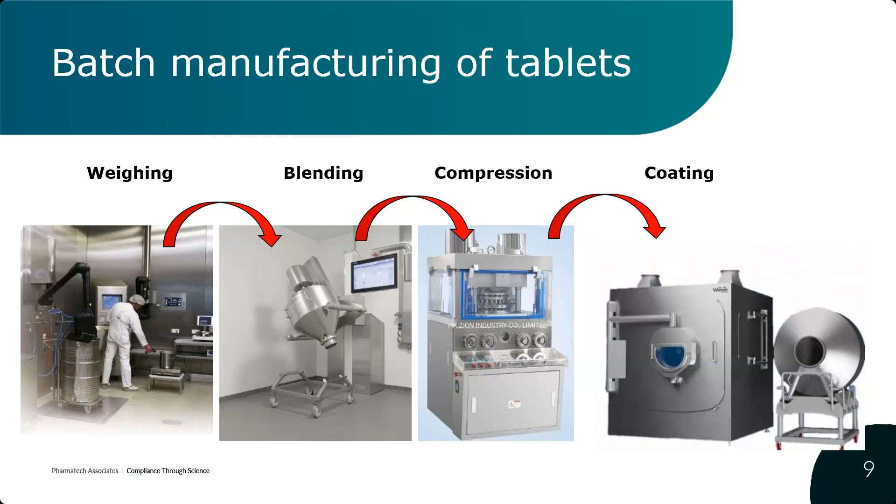After the release, the tablets can still go to the coating process. It's not always needed, but in some cases it is. Then after the coating, the final release tests happen that release the product to go to the packaging area.

Now, in some circumstances, it's possible that there are flow issues or segregation issues, and in that case, a dry granulation or roller compaction step is often added, where the powder mix goes between two very big rolls that press the powder together and create a ribbon. This ribbon falls apart into flakes that can be milled to the correct particle size distribution.

If the blend has compression issues as well, a wet instead of a dry granulation step could be done to create flowable granules with good compressing behavior, and after that it can go to the milling step again. Like that, well-flowable granules are being shaped and formed, and this should give good compressing behavior.

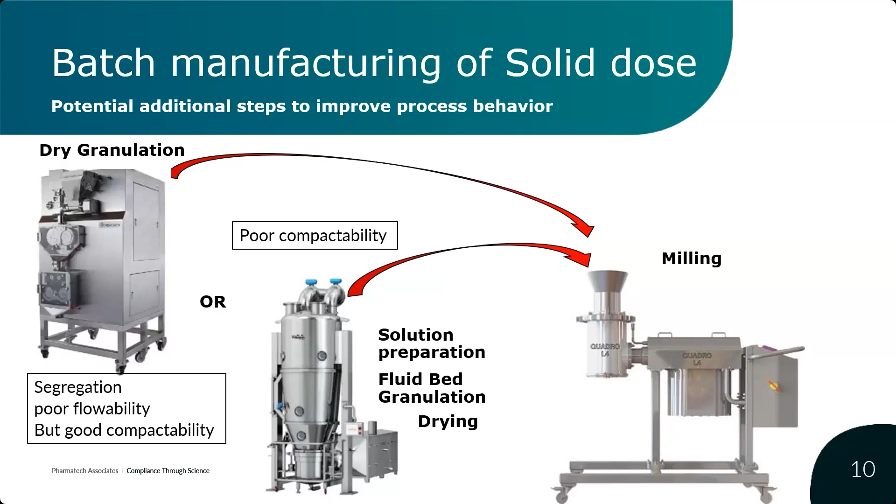Now, between all these steps, there are many days of testing needed. There's a lot of work to move the material around and handle the batch records. There is space needed for the storage of all the materials, and a lot of handling and transportation going on. So the cycle time of a complete batch process is very long to make solids, and it can be very cumbersome and expensive as a process as well.

Now, just imagine that if you could combine all these machines together into one large equipment train, connecting all these unit operations. You would be able to feed in all the material on one side of the line, and take out all the finished products on the other side in one go. So you would not have intermediate storage, you would not have to test in between all the time, and you would not have all those batch records.

You only have one batch record at the end of the process. Your batch size would then be defined not by the size of the equipment, but by the duration of the run, and that would be very beneficial. It would mean you could define yourself how long you run, making very large or very short batches, all using the same parameter settings. That means if you scale from development into commercial manufacturing, you would not have to change any parameters, so the tech transfer can be done very easily.

Also, during development, instead of having to make a new batch with each set of parameters you want to test during your design of experiments, you just have to run very shortly. You can switch over to your next set on the fly, and do fast and easy design of experiment sets with a very limited amount of material.

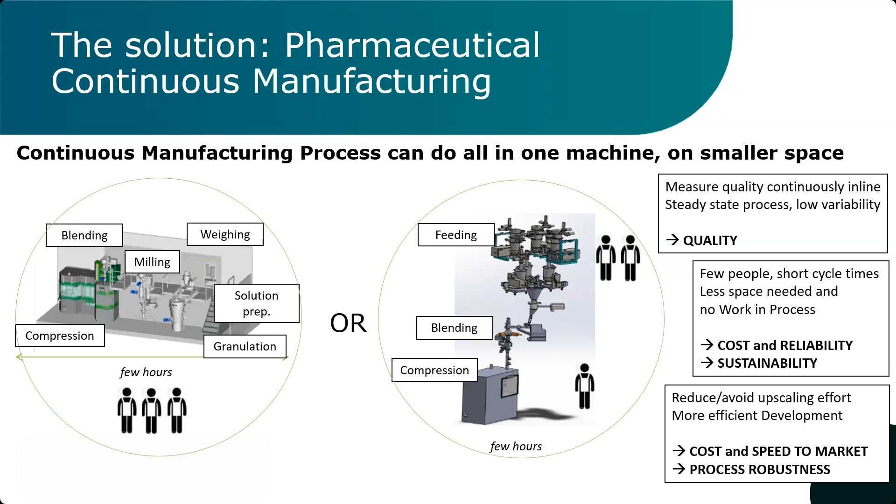That sounds wonderful. So in oral solid dosage, we've really seen that facility size can be reduced significantly. And what you said, Lawrence, about faster time to market, I think that's also relevant for generics because of the exclusivity period. If you're able to go to market sooner, that has significant economic implications.

When we look at the real differences between CM and batch, we already saw that in batch we have individual unit operations and equipment, and you move your entire material one at a time through those unit operations. We also saw a continuous line wherein the material flows from one end into the other. So there's definitely a sense of continuity in the material movement.

But if we go by the official definition, which regulatory agencies have harmonized, a continuous manufacturing process only needs to have a minimum of two unit operations which are connected together, with material flowing between them. That means a lot of so-called semi-continuous processes can also be considered continuous manufacturing operations, even when you have multiple unit operations still being operated in batch.

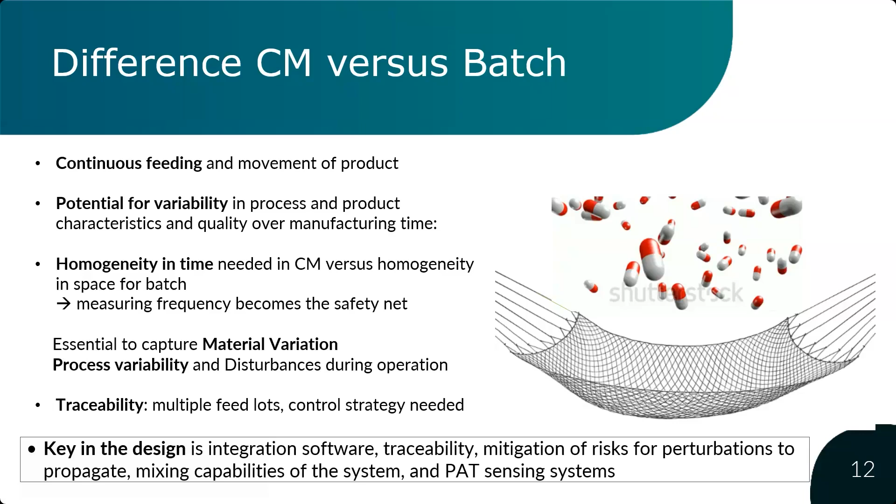We'll see how PAT and other systems help in the process. When we look at the potential sources of variation, this could be a longer list, and this is just a subset. It's very interesting because some of these sources of variation we do not have to worry about in a big batch equipment.

So you have incoming material feed, and you may have excipient batches coming from different vendors, or even different batches or lots of the same excipient. There can be minor variations in bulk density or particle size distribution. To mitigate this, I heard one company mixes 5 incoming lots together, homogenizes it, and then feeds it into their feeders. That's an interesting approach, but it depends on your material what kind of approach you want to take.

Then there can be some special causes for variation. For example, electrostatic behavior is critical in powder flow. If the powder is very electrostatic, it makes it difficult for it to flow, and we'll see some of the effects later on. Also, humidity.

In powders, it's very interesting: powders can behave like solids, they can behave like fluids and flow, and they can also behave like gases, as in they can fluidize. Humidity has tremendous impact on that, so sometimes we need to maintain a certain level of humidity in the environment.

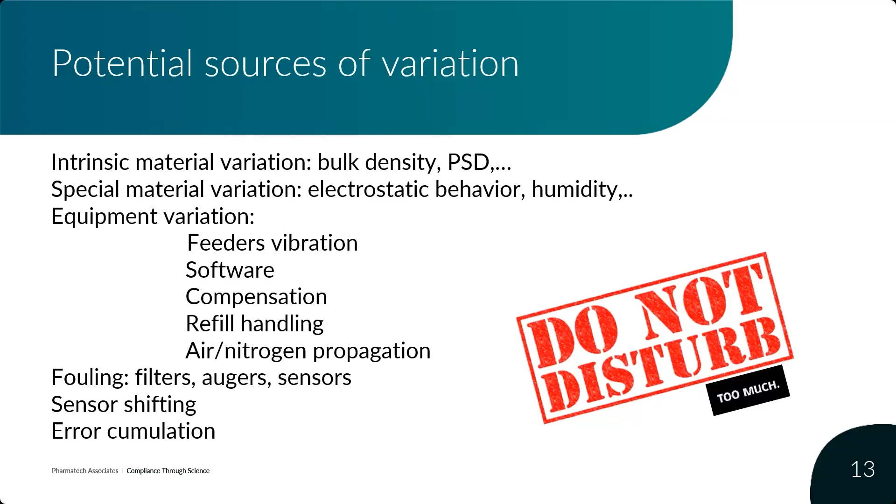Now, hearing Atul talk about the variation of a system, it becomes clear that feeding is the most important source of variation in the continuous manufacturing process, as it is the start of everything. But feeding is never perfect, and variation will always occur, because you work with augers, because of the variation of materials, because feeders are moving and vibrating on top of very sensitive weigh cells, and because feeder hoppers need to be refilled regularly, so the weigh cells need to stop working until the system is stable again.

And so the measuring frequency and the averaging of the data that comes from the feeder, from the weigh cells and the software, becomes very, very important. Because if the averaging or the frequency is too long or too late, then the real fluctuations can be missed completely, and it can give a completely false idea that you would think it's constantly dosing, but in reality it is not.

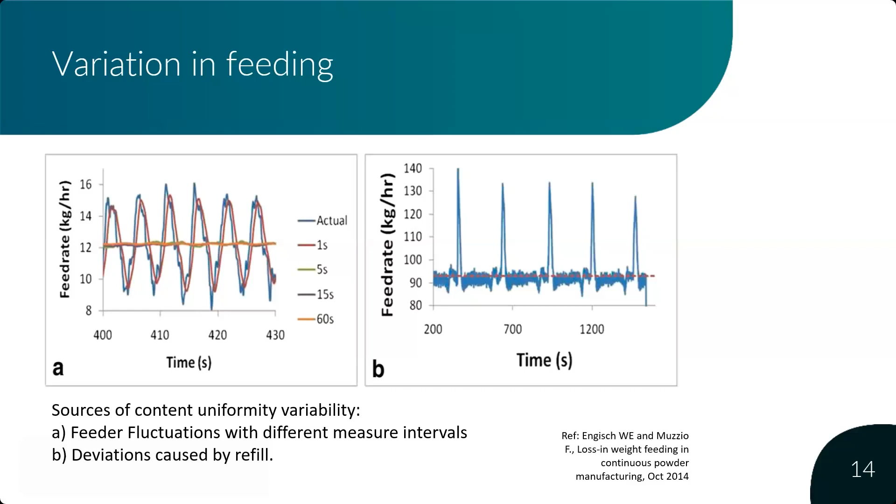Now, an overshoot of API from a feeder could end up in a tablet a few minutes later and potentially can damage the health of a patient. And so something needs to be done to mix all the ingredients and to minimize the impact of all this variation. All the time, and in every continuous manufacturing application, an inline blender is installed.

Now, more mixing by that blender means blending out variation better, but it also spreads it out more, so it will take longer to wash variations out. That's also not always ideal. So to find an optimum, the mixing capability of the blender for every formulation needs to be well understood.

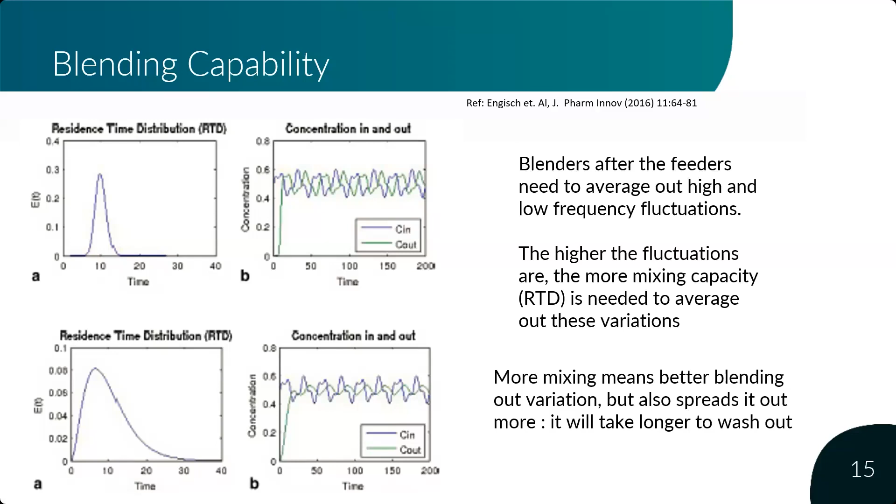And for which, how we do that, we call in a concept that is called residence time distribution, or RTD. Now, RTD is a probability function, a distribution function of the time that particles need to move through a section of the line. And that describes how a particle behaves inside the reactor.

First that is defined theoretically, and then it will be tested with experiments that prove the theoretical curve corresponds to reality. And that's how it's done.

Now, after defining the RTD like this for an individual unit operation... Lawrence, before you move forward, I do have a question. Yes, Gabriela? Related to the tracer.

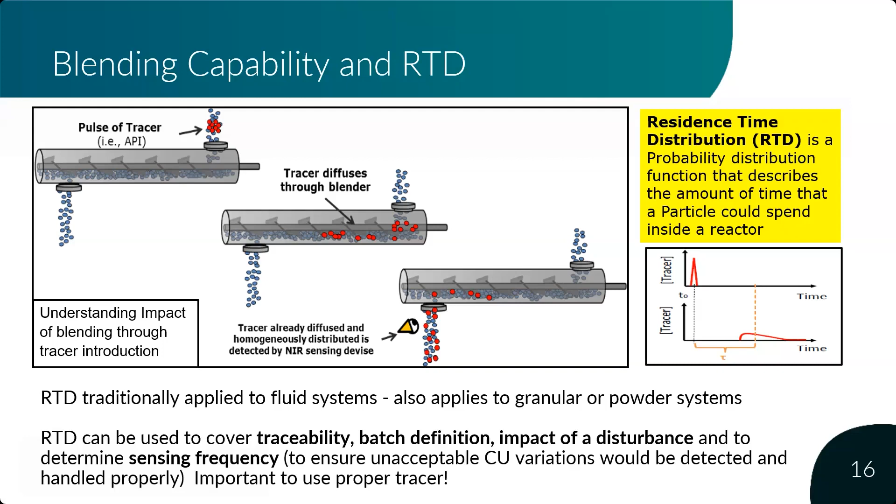Once you've done the RTD calculation for a blender, you can also do that for your compression machine, for other blenders, for other parts of your line, even a tube where material passes through. Then you bring all of those RTD models together into a full line RTD, which gives you an understanding of how variation or disturbances propagate through the line from beginning to end.

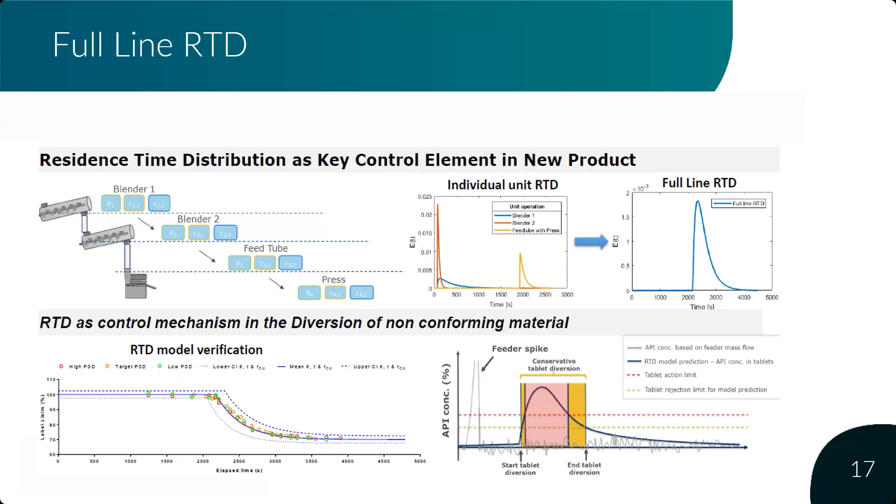All of this will give you a lot of information. It can help you detect a disturbance and know exactly when you need to open up your reject valve further down the line. It can also help you, if you find an out-of-specification result at the end of the line, trace that back all the way to the individual sublots of excipients or API used at the beginning of your process. And it can help you identify what the sampling frequency or measuring speed needs to be for other sensors in your line, to ensure you can capture all the variation of your process.

So what can go wrong in a typical CM train when we look at just the feeding unit operation? These are some good pictures that really demonstrate what can go wrong.

There are powder flow issues, as we all know. In a feeder, typically we have a screw auger that is conveying the material out of a hopper. And if the material is too sticky and it sticks to either the auger or the walls of the feeder, it can create challenges—you could have clogging, you could have obstruction to the flow.

The properties of the material, such as cohesive properties or electrostatics, particle size distribution, and surface energy, are measurements or properties that impact electrostatic or cohesive behavior. These could create phenomena you see here, such as bearding of the material—it creates a beard-like thing, I call it the Santa Claus beard, out of the feeder outlet—or it can create rat holes, where the material sticks around and you have an empty space in between with nothing flowing out. You could also have material that coats surfaces.

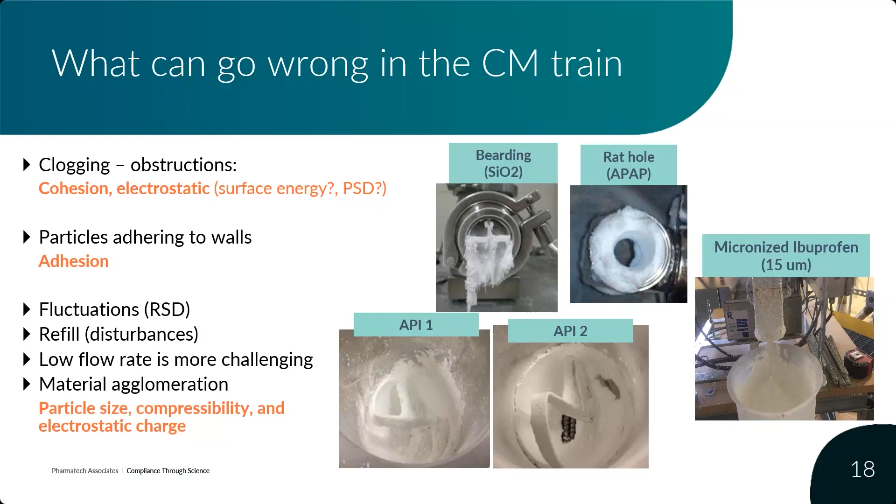This is why proper characterization of material properties is so critical, and material characterization is an important element of control strategy for any process. Knowing our material is extremely important, because these flow issues can really make or break a continuous manufacturing process.

So how do we solve this? I can tell you there are solutions available for each of these flow issues. We have to fundamentally understand our material and the equipment we're using, and the interplay between that material and the equipment. So we have many solutions.

You already saw some agitators in feeders that are there to make material flow. And I'll tell you a funny story—I've seen a hammer often used at some companies, jokingly called the GMP hammer, used to hammer on the vessel to make the material flow or the powder fall. But we have to be careful about all these solutions, since they can introduce variability due to vibrations.

So we have other devices like outlet screens, agitators, impactors, and vibration units, and special types of hoppers. You can also make changes to the material itself to help it flow better—you could deionize it, apply special coatings, and so on.

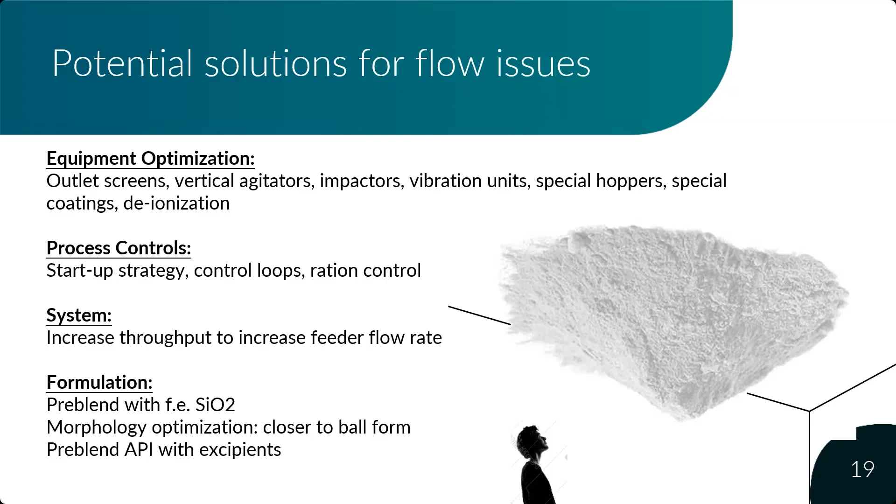That table that you see on the screen now shows, for instance, that there's a lot more charging that happens when there's pneumatic conveying of the particles, because those particles typically rub more against each other than against the wall of the equipment, and that is what gives the most charge, or more charge, according to Gibson. And that's surprising, because you would think that milling would be a lot more impactful at first sight than pneumatic conveying, but according to his calculations and experiments, that was not the case.

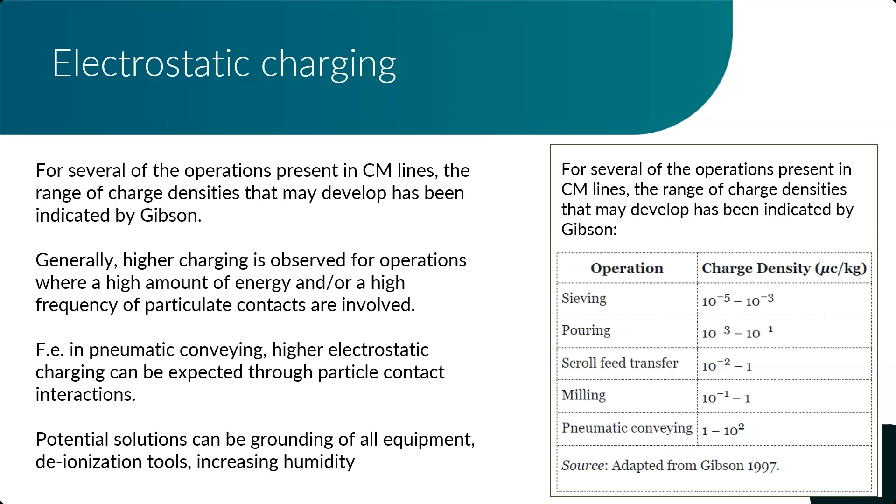Now, overall, with everything that's said about variability, we can conclude that you create a robust process if you're able to have full reliability under different conditions with different disturbances, and your capability to handle variation is what drives your robustness in a continuous manufacturing process. And it's the ability basically to achieve acceptable limits, and in reality that often is measured with things which are called process capability, CPK, or process performance, PPK.

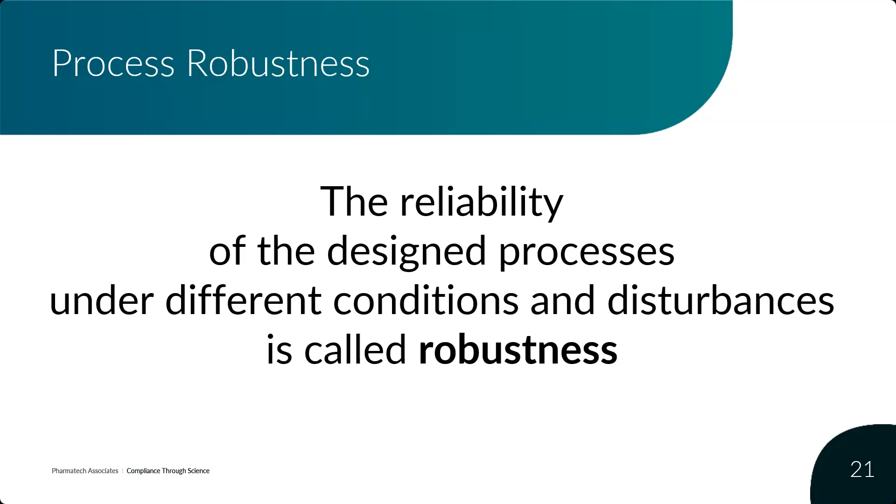So to ensure our quality, we need to have a control strategy, and we need to demonstrate that we have a solid control strategy. What goes into the control strategy? As we can see intuitively, I already mentioned that you need to understand your materials, and that goes into your control strategy. We also need to understand our equipment, what kind of equipment design we have.

There are several types of feeders available. There are different types of continuous blenders available, and they have different blade designs, etc. So we need to understand that, and then what kind of impact those blades would have on the material, how shear sensitive our material is, and all of that matters, and it has implications on the product quality, and all of that also goes into the assessment of the risk that you have when you carry out these operations.

So we need to understand, say, what is the range of my impeller speeds that I can work within. And when I look at each equipment and each unit operation, and I try to understand the range within which I can operate, I tend to create what I call a parametric control, or the design space. So you have your parameters for every unit operation. Sometimes, because this is a connected process, those parameters affect each other. So when these parameters affect each other, instead of having a range for each parameter, it is better to have a design space within which we know that our process is going to behave the way we want it to behave.

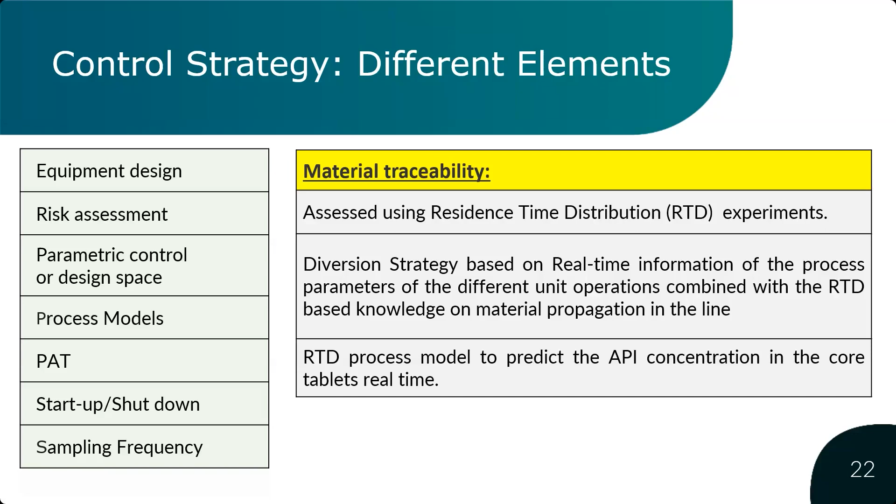And then equipment dimensioning, depending on the kind of feed rate ranges we want to work with, whether we want to operate at 25 kilos an hour or at 110 kilos an hour. So we need to make sure our equipment is appropriately dimensioned. And there may be certain unit operations which may be in batch mode. For example, drying is often done in batch, so we need to make sure we dimension our dryers accordingly, depending on the load.

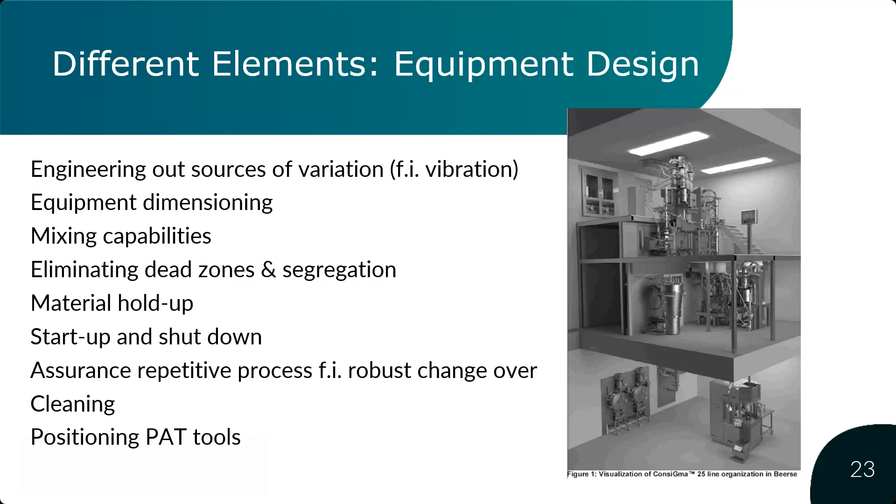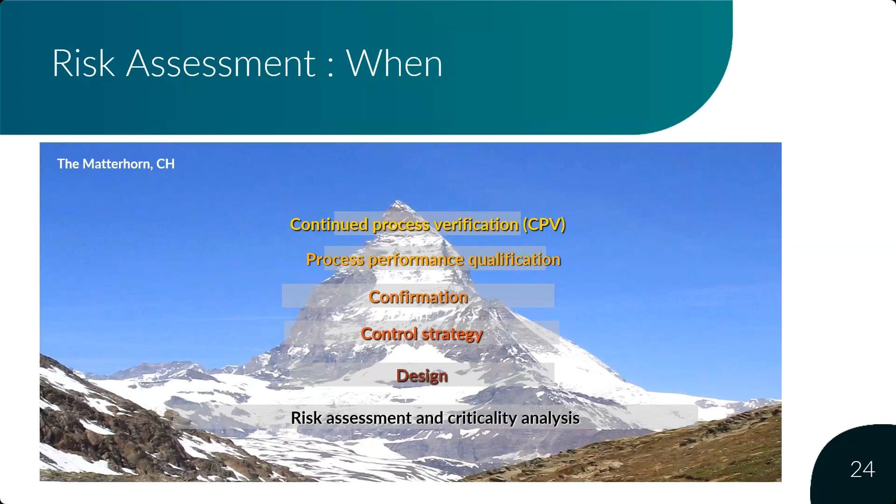Quality by design starts with understanding the risks and then mitigating them. In continuous manufacturing processes, we start just like that. We first do a risk assessment and a criticality analysis. This gives us an overview of the overall design criteria. Then we build a control strategy, and in the next stage we do a confirmation. The settings are frozen and validated in a PPQ phase. Then once we run commercially, it's possible to use CPV, or continued process verification, to assure with trending data, etc., that the process remains under control over time.

Now, after the initial mitigations, there will be a number of iterations. We need to do that risk assessment a number of times until all the high and medium risks are resolved. Only then have we really finalized the critical process parameters and critical material attributes, because until we have mitigated all the risks, they still might need to be changed. So that's how you do it.

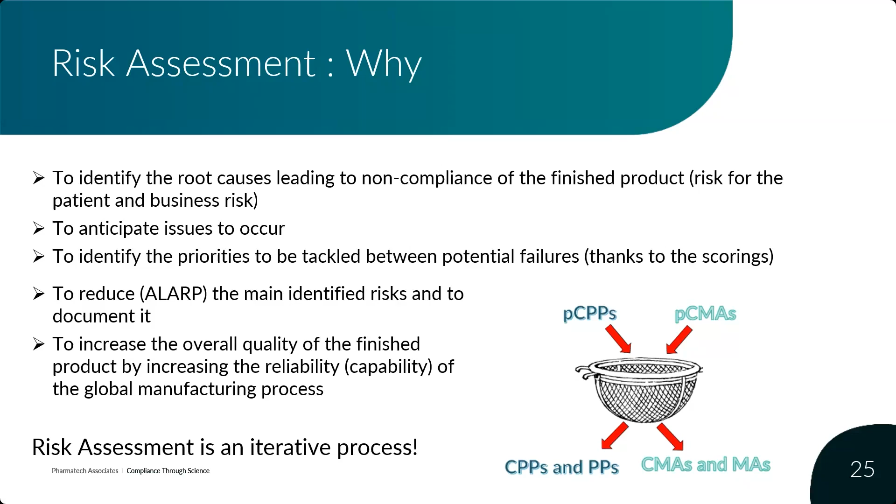And the lower your risks, basically, the higher the reliability of your process. Now, the CPPs can be set as a range, as Atul said earlier, or they can be set as a design space. Now, what is the difference?

In the conventional way, you defined two values for every CPP, and in between there the process needed to stay. That's a parametric setup, with only two fixed values in between where it has to stay. Now, in case of parameters that are dependent on other parameters, those two values might change. They might become larger at certain moments, which gives you an opportunity to run your process on different or additional points. But in reality, for the parametric approach, you keep it at the worst case, so you do not take advantage of that opportunity.

So, Lawrence, can you elaborate a little bit more? What's the advantage of working with the design space?

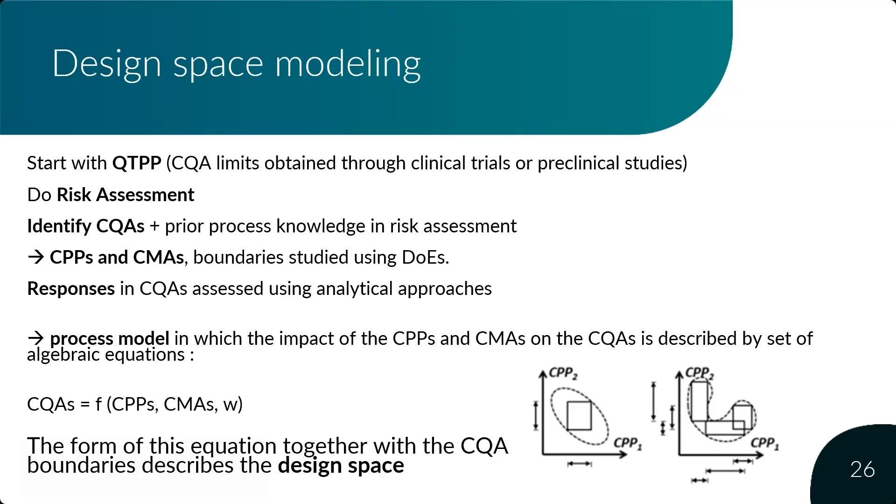If you look at the little drawings at the bottom, if you would work with parametric control, you would stay within the little squares on these graphs. That would be your operating space. Your CPP1 and CPP2 both need to stay within those values. But if you make them interdependent, you can create a design space set by algebraic equations, giving you a completely different shape. The elliptic forms or different shapes give you more area where you can maneuver, and in reality that means you have more area for the same amount of variation, which gives you a better yield for your process.

So like I said earlier, material characterization is critical for the process to succeed. The goal here is, again, to make sure that we quantify the properties and their effect on the process and product performance. So essentially, what are we trying to characterize here?

I'll just be brief about it. We're dealing with powders, so essentially we want to look at the bulk density, which can be looked at in two ways: tap density, wherein you tap the material and see what it is, and otherwise just the normal density. Particle size distribution has tremendous impact on flow properties potentially, so it is important to understand what particle size distribution we have in each of the components. We know that particle morphology, like I mentioned earlier, we want to eliminate needle-shaped particles as much as possible to make sure they flow well. So morphology is also important.

And there are also tools available to measure things like electrostatic behavior. In fact, USP is coming up with a new general chapter soon on electrostatics and also on wettability, because in wet granulation processes wettability is important. And then compressibility using a compaction simulator - that's another new general chapter USP is coming up with. So it's important that your material is compressible to the degree that you want it to, and there are no undue behaviors once it is compressed.

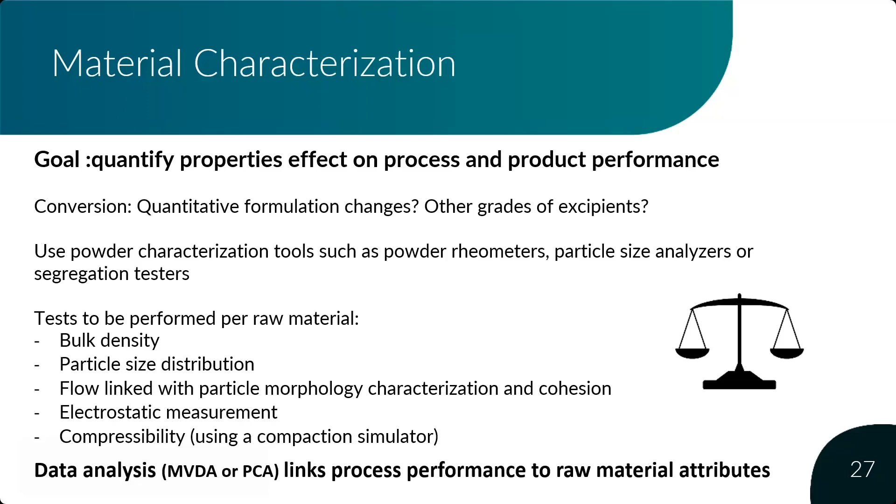So there are tools available to characterize all of these parameters. And then once you have all of this data coming out from your analytical tools, you can really perform data analysis and link the material behavior, material attributes, to your process performance.

Then we come to the equipment characterization. There are processes or tools available to characterize each unit operation in detail. So we can characterize feeders, how they are working, and we can characterize blenders, the lubrication. At what point do we add the lubricant is critical sometimes, because if you over-lubricate your blend by adding lubricant too early, that can impact the dissolution and bioavailability of your product. So of course during wet or dry granulation, we need to look at how the equipment is impacting the properties of the granules. So for intermediate materials such as the granules, it's important to make sure we have the critical process and critical material properties down there.

Compression also, like I said, there are simulators available for compression that tell us how the material will respond to the punches hitting it from top and bottom. What's going to happen to the particles within it? Is there going to be any capping or any kinds of challenges? And when the tablets come out, are they friable or are they good? Do they need a relaxation time or not? So all of those things are characterized along with this equipment.

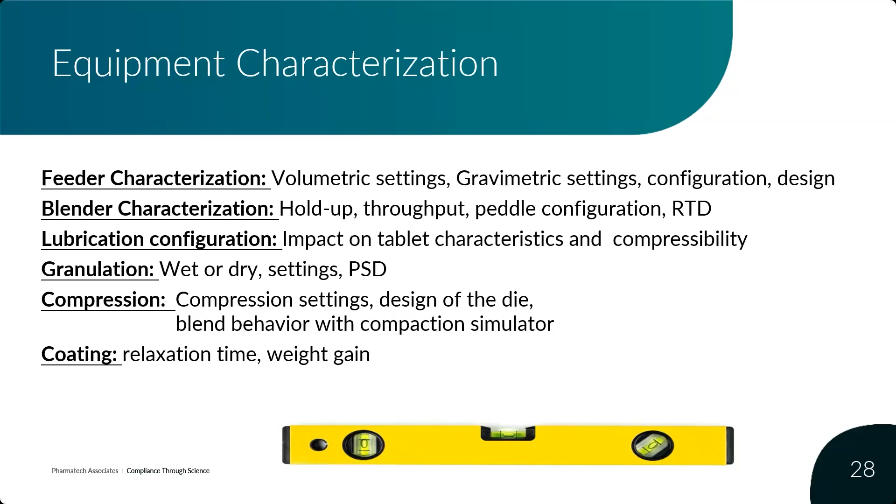And then finally, the coating - how much weight gain the tablets have due to the coating. Is there variability intra-tablet or inter-tablet or inter-batch? All of those can be characterized, and there are well-researched papers available for that.

Once you've done the material characterization, you start first with your risk assessment, then your material characterization, equipment characterization, and you have your RTD models defined. Then you bring all those RTD models together with the CPPs, which are by then clear and fixed, and you have your design spaces defined.

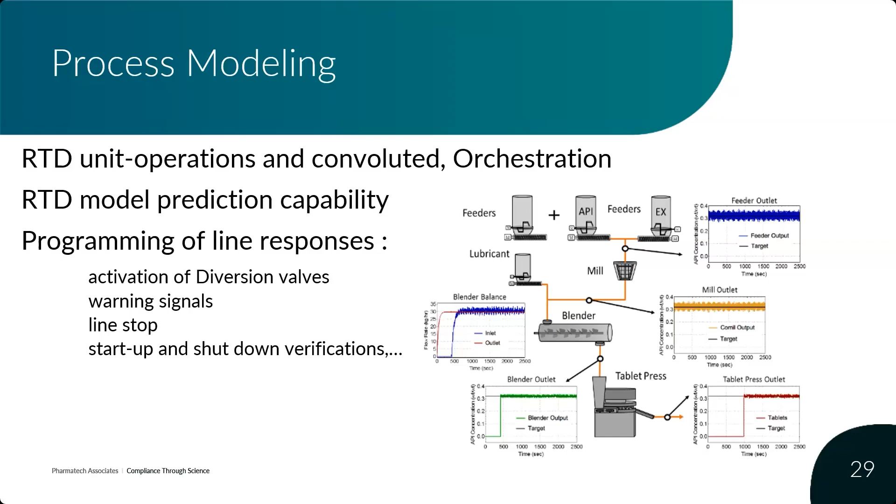You bring all of those aspects together and create a full process model, which informs how the line needs to react and respond depending on what happens with the product or process. Does a diversion valve need to open? Does part of the batch need to be rejected? Will the line stop, or does it just give an alarm? Your process model also informs how to perform startup and shutdown activities. Overall, we call that orchestration of your line. That's what process modeling does.

We talked about PAT earlier—why do we need to use it? We need PAT so that we understand what's going on within our process. The aim is to understand variations in material properties early on, and then what's happening to the material as it's being transformed during our process.

We have various probes in different unit operations measuring things like particle size, pressure, and temperature. Probes in feed frames look at content uniformity right before compression, and there are also probes at the outlet of the blender, as Lawrence showed earlier. This captures any variability or special cause variation from an unanticipated event, and also helps us understand the natural variability that happens when we change incoming lots of materials.

This data could feed into a process model or a machine learning model in the future, and that could essentially help us achieve real-time release by showing that we have control over the process at every step because of this data.

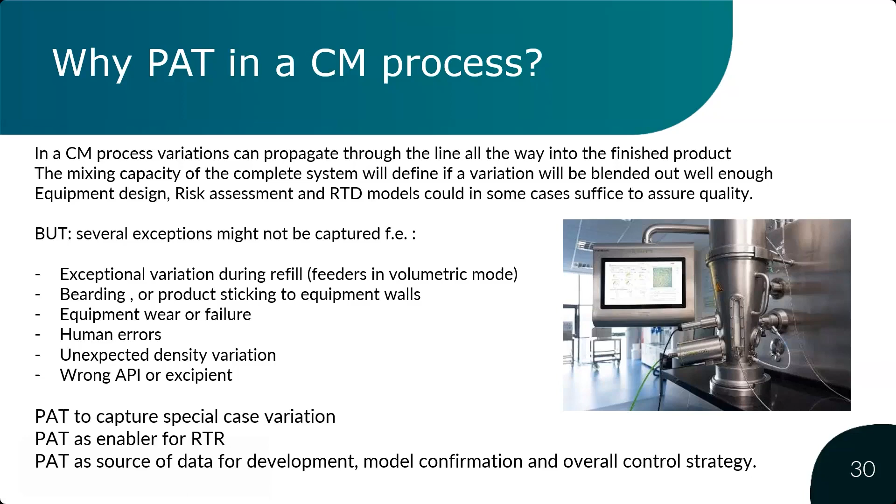So Atul, I have a question about PAT equipment, since you're showing it's used at different stages of the process lifecycle. How can PAT equipment further mature for the purpose of continuous manufacturing applications?

The way I see it, the role of PAT equipment is to see and tell the operator what's going on within the process, but that operator doesn't have to be human—it could be a soft sensor or some kind of model. So with PAT probes, what you look at is making sure they're able to sense and convey the correct information.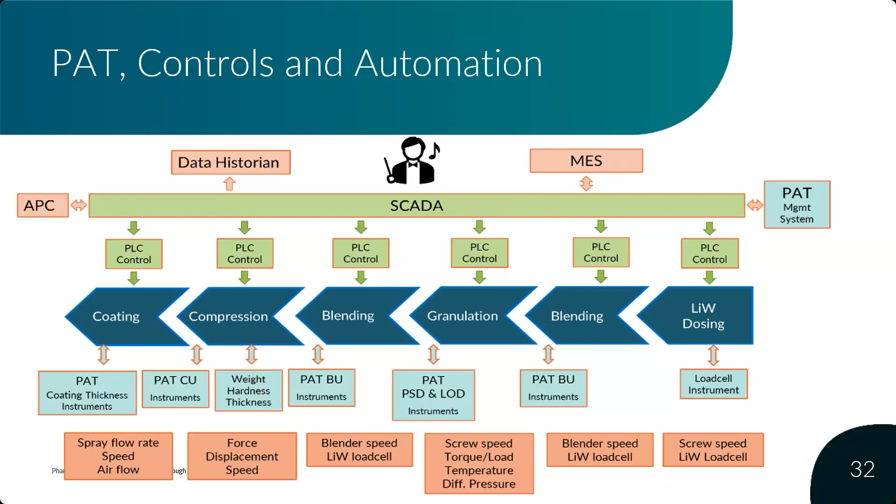Real-time release is essentially a goal, but it is not a necessity to file real-time release. Many companies choose not to do that, but it is achievable if we have material understanding, process understanding, the right process models, the right PAT, and everything feeding into an intelligent way of doing things.

There are several CQAs that are listed here, and there are RTR methods associated with them. And then there are the traditional methods like the UHPLC, which would back up your real-time release sensors.

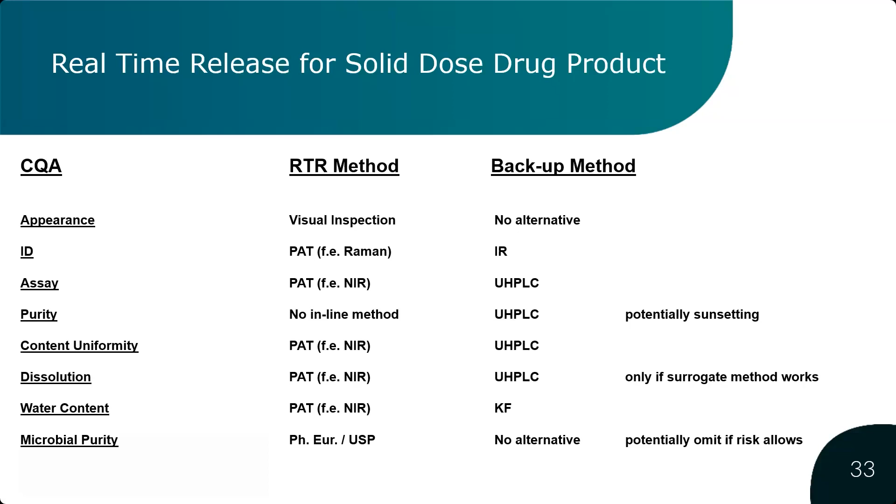Lawrence, do you want to elaborate a little bit more on that, or we don't have time? Yeah, I think we have to conclude in the meantime, Atul.

Thank you very much. So as a conclusion, I think we may very well say that continuous manufacturing can really assure high quality in your manufacturing processes. The resolution with which you can look at the process using PAT, you can compare that with looking at the stars with a telescope instead of with binoculars or with a naked eye in conventional systems.

So you can adjust your processes on the fly while you operate, keeping it in the sweet spot. Experience also shows that continuous blending gives more homogeneous results, and twin screw granulation gives narrower particle size distribution compared with conventional systems. You can develop using QBD processes, making things more robust, and you can understand your processes a lot better with all the data that you generate.

Scaling becomes easier with lower risk, and manufacturing can happen with immediate measurement of your quality instead of measuring it afterwards and potentially having to reject the full batch. Summarized, with continuous manufacturing, you can upgrade your resolution and get to the next level of quality.

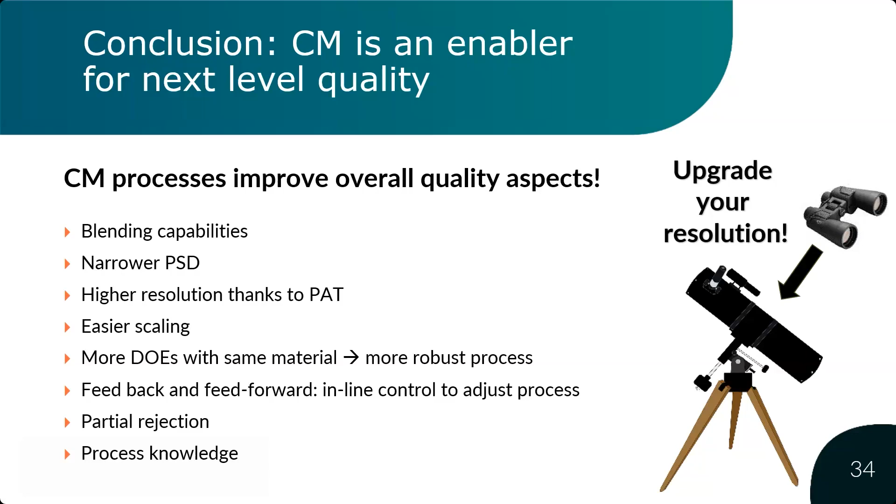I think that's overall the presentation for today. Now I think we can go into the questions.

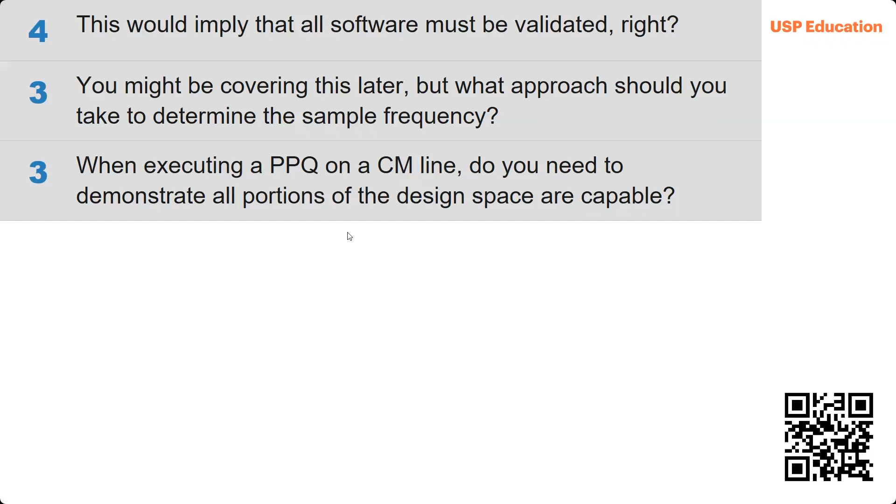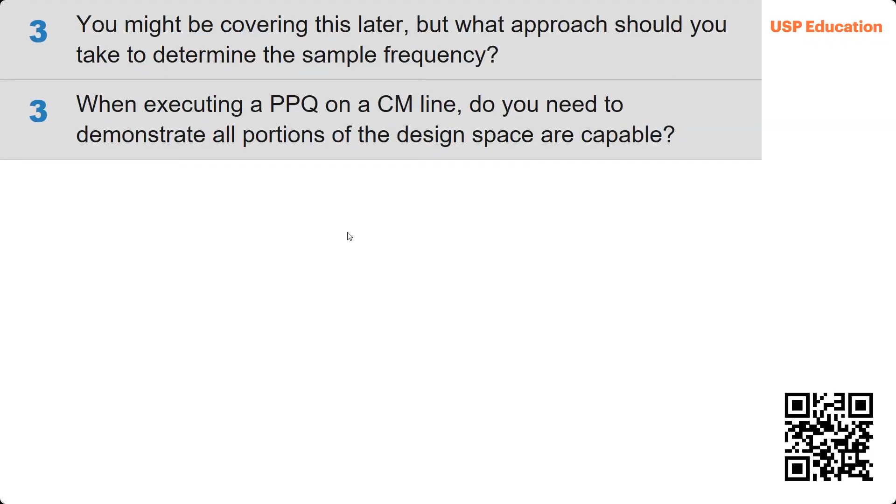The approach to determine the sampling frequency is what we explained. With your RTD model or process model, you identify the duration and size of your peaks, and together with the blending capability of your line, you identify what might be leftover potential variations that you cannot capture or blend out. Those you need to capture. Your RTD informs you how wide and how high these variations can be, and your sampling frequency needs to be frequent enough to assure that you capture those variations. Because if you sample less frequently, those variations might still impact your quality and might slip through your safety net.

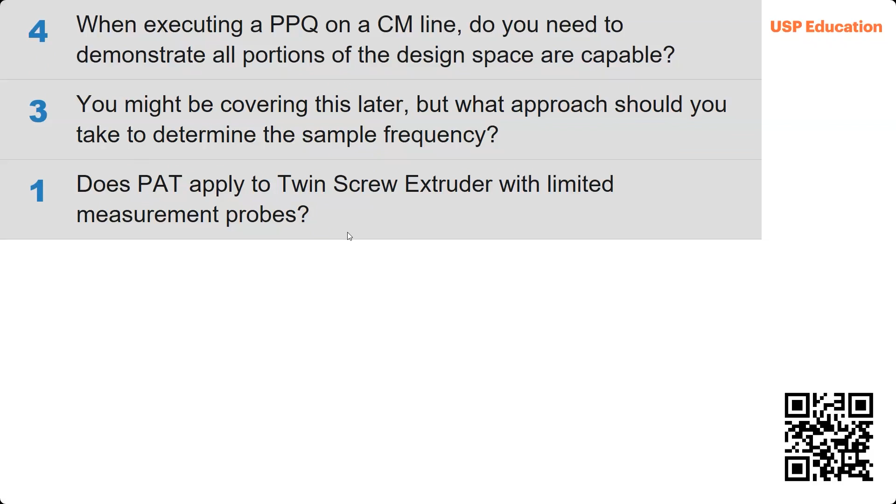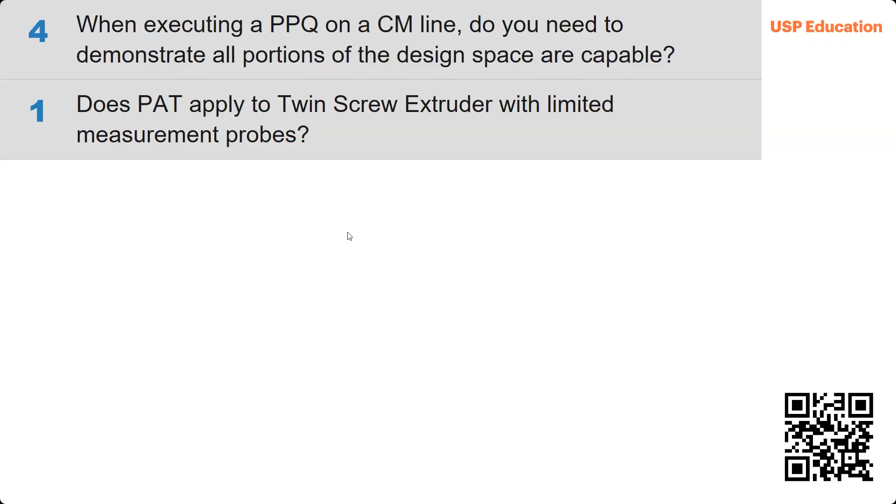Does PAT apply to the twin screw extruder with limited measurement probes? So PAT typically is used as well with twin screw, after the drying stage, measurement of the particle size distribution on one end and of the humidity on the other end. Typically that's only done when it's dried already, because measuring with wet granules is a lot more difficult than with dry granules.

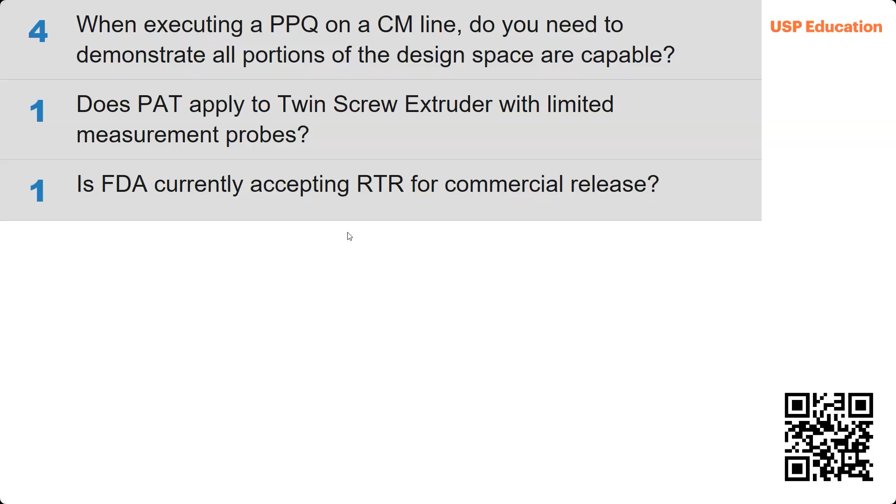FDA is accepting real-time release for commercial release. There's a few examples out there. The first product of Vertex is full real-time release, and also Prezista of Janssen, which is a batch to continuous conversion that initially was accepted with real-time release only for assay and ID, and afterwards including for dissolution. So the full package of real-time release aspects were accepted there. So yes, FDA is accepting real-time release for commercial purposes as well.

When we execute a PPQ on a CM line, do we need to demonstrate all portions of the design space are capable? With a PPQ, you do not need to prove your boundaries. You need to run at your process settings. You need to prove your design space earlier down the road, in earlier stages of your development.